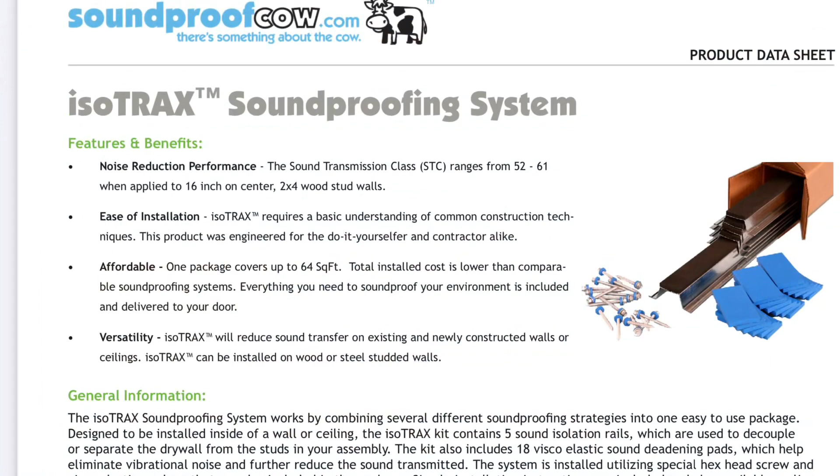This product looks like it'll do exactly what we need. It'll isolate the walls without having to build a secondary wall. It's much thinner, the technical specs are pretty good, and it's easy to install. It's not going to cost us a whole lot, much less than building a second wall, which is what I thought we were going to have to do to start with. I couldn't find anywhere that told me how much thickness to account for the additional tracks, so they said to call them, so I did.

Soundproof Cow, this is Justin, may I help you? Hi, my name is Mark Good, and I'm interested in using your IsoTrax materials for a project I'm doing, but I have a technical question. I'm looking at installing it on a ceiling, and in order to drop the fire suppression sprinkler head the proper distance, I need to know how much lower my sheetrock will be using the IsoTrax than without it. So the IsoTrax will be an inch and a half off the joist, plus the thickness of drywall. An inch and a half off the joist? Okay, correct, that answers my question. Thank you very much. You're welcome. You have a great day.

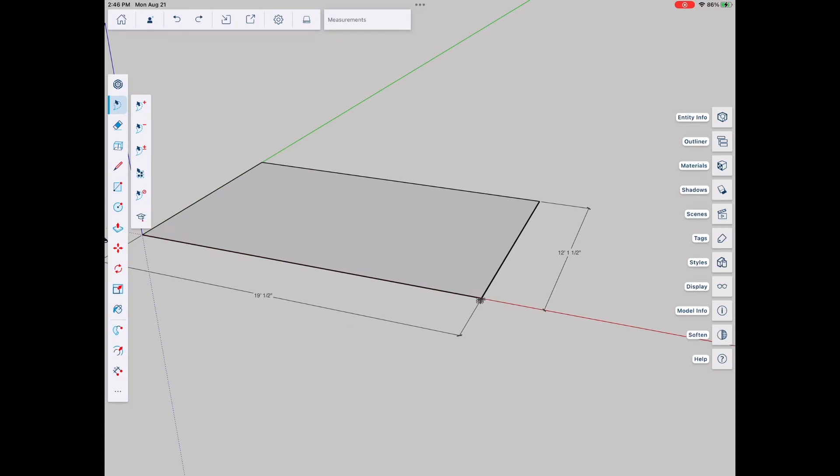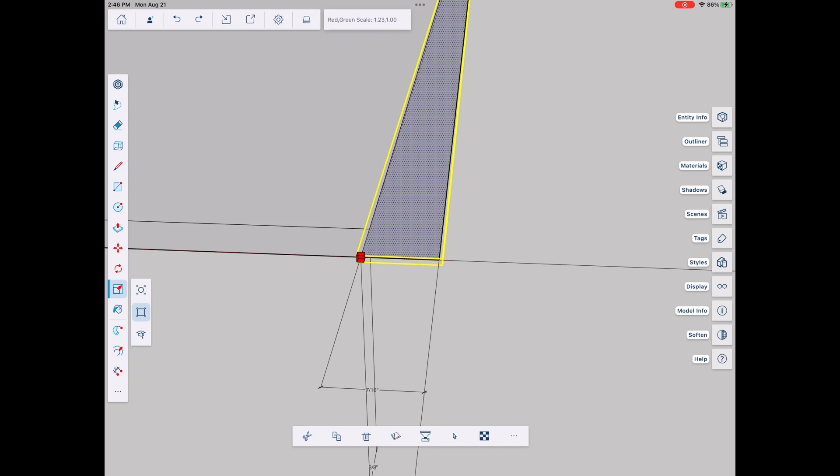You too, bye-bye. So the first thing we need to do to our floor plan sketch is the back wall. The specs for all of the IsoTrax materials call for 5/8 inch sheetrock, and we had put in 3/8 inch. We need to do this mostly just for consistency's sake. There's rock behind this wall, so IsoTrax doesn't need to be put on this wall, but it might be a good thing to just keep everything consistent. So that's what we start with, move that out to 5/8 inch.

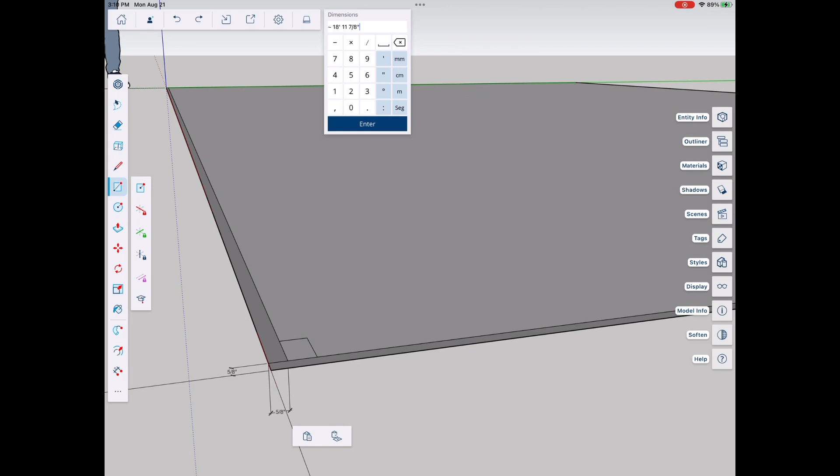Now we need to do the same thing to the wall that faces outside. We need to make everything consistent in the width of the sheetrock. I think that'll be easier to get constructed. Originally I was not going to include IsoTrax in the outside wall, but after listening to helicopters fly over all day and thunderstorms and that sort of thing, I don't think we can do without it. So let's add that to the outside wall.

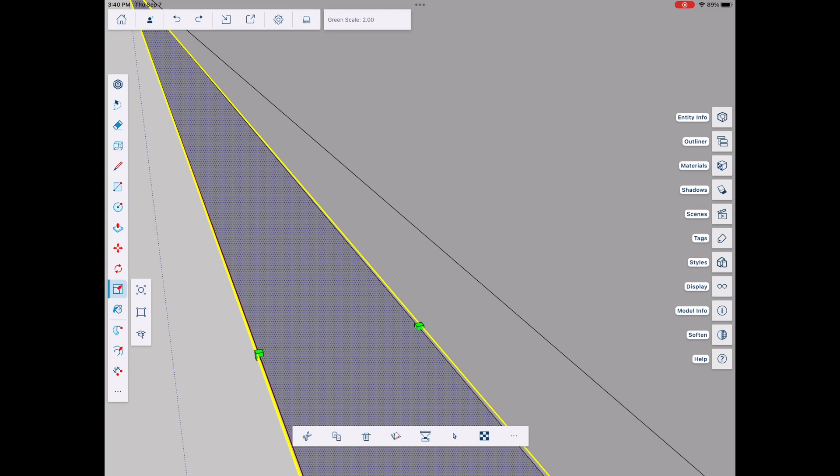The first problem we notice is that we have the sheetrock and the IsoTrax reversed. Right now the sheetrock is against the studs and the IsoTrax is against the sheetrock. We need to reverse that. The easiest way is simply to move the line between the two out so that the 1.5 inches is on the wall side and the 5/8 inches is on the inside of the room. So we grab that square and elongate it to 1.5 inch, then measure the other, which should be 5/8 of an inch, and indeed it is.

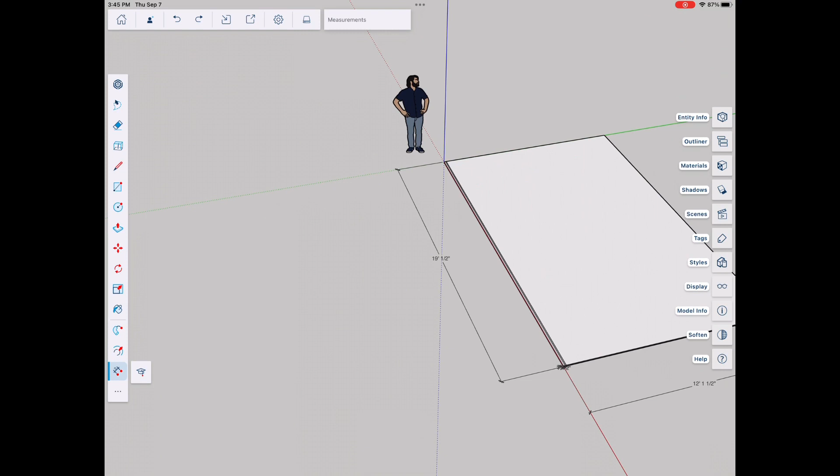So the next thing we need to work on is the wall next to the garage, the back wall where the speakers and the projection screen would be. But there's a beam, if you remember. So we need to place the beam in the proper location, and it's 5 3/4 by 2 1/4. We need to make sure it's the correct distance from the wall, so we put a marker down for that, and then we'll move the beam back and forth until we get it in the right place.

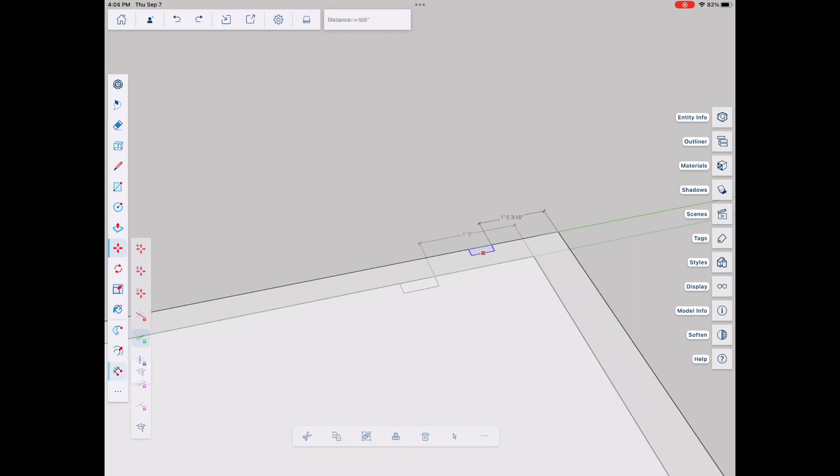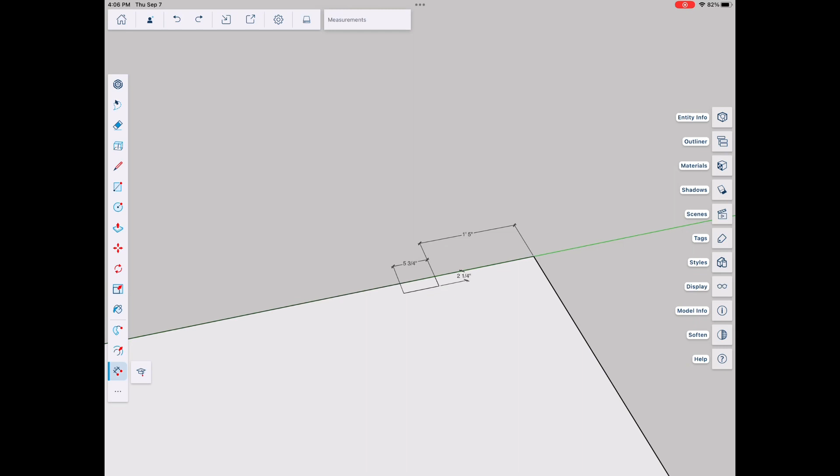Now it's important because the beam is thicker than the actual IsoTrax, so we're going to have to deal with moving the sheetrock out an additional amount. We have to clear 2 1/4 inches, and we don't want the sheetrock touching the beam because that would be an acoustical coupling and transmit noise through the beam. So there's our 5 3/4 inch for the spot, and it's 17 inches from the wall, and that's where we'll leave it for now.

We'll keep working on that, but more fun is to be had in the studio. We have a new bass track that we have to put into our existing real country song. So let's go in and import a new bass track.

We select that from the bass track that we got in an email, and we put it into our phone. We send it over to convert. Once we get it converted, we put it in the right place, and then we give it an appropriate name. And before you know it, we have a new bass track. Of course, it hasn't been mixed yet, and it's a little bit loud so that we can hear it above all the other tracks.

Once we got the bass added, we also need to add in a couple of pluck guitar tracks, pluck 1 and pluck 2. So we convert them and put them into the project as is.

The next thing we need to do is match up the old pluck guitar effects with the new pluck guitars, because we like the effects, at least as a starting point. So we add some plug-ins for the reverb right there and select that.